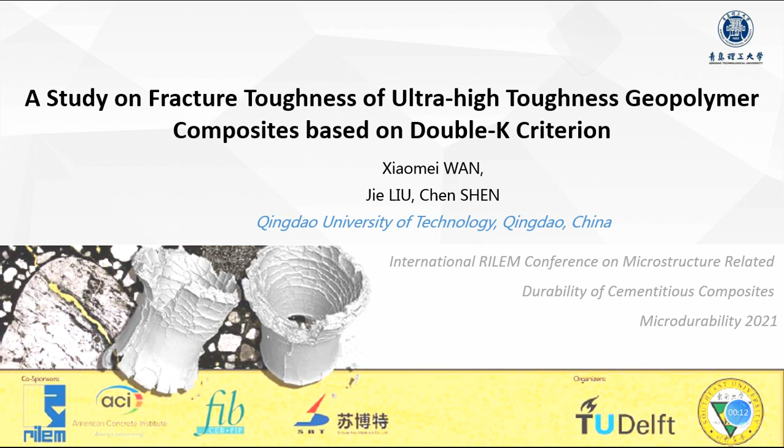The title of my presentation is Fracture Toughness of Ultra-High Toughness Geopolymer Composites based on double K criterion. The presentation involves 4 parts: background, experimental, results and discussion, and conclusions.

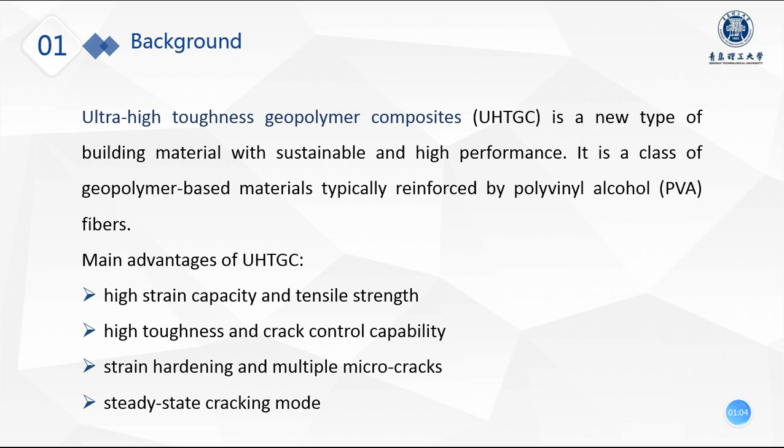Ultra-high toughness geopolymer composites is a new type of building material with sustainable and high performance. It's a class of geopolymer-based materials typically reinforced by PVA fibers. The main advantages of UHTGC involve high strain capacity and tensile strength, high toughness and crack control capability, strain hardening, and multiple micro cracks, steady-state cracking mode.

Fracture toughness provides a criterion for interpreting crack resistance of concrete under different loads. Furthermore, the degree of crack propagation is determined by fracture toughness, which has important significance for analyzing the performance of concrete. Xu and other researchers proposed a resistance curve Kr based on crack cohesion and the double K fracture model, which solved the problem of characterization of the whole process of concrete fracture.

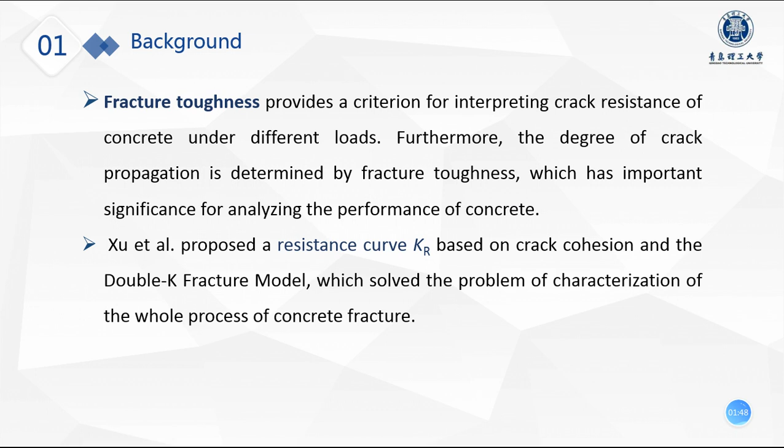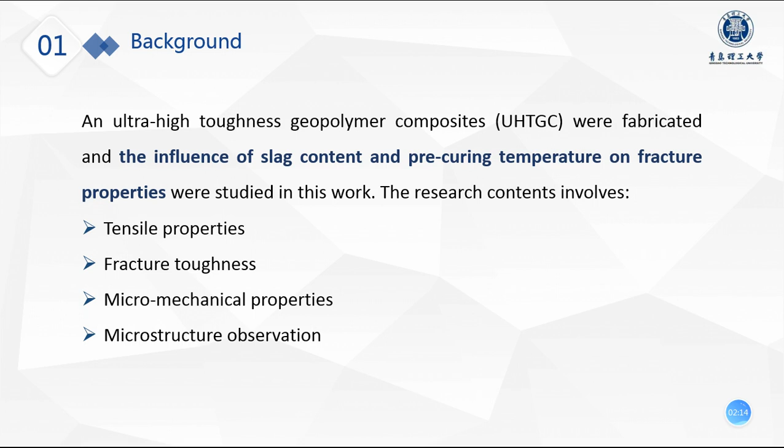In this work, an ultra-high toughness geopolymer composites were fabricated, and the influence of slag content and pre-curing temperature on fracture properties were studied. The research contents involve tensile properties, fracture toughness, micromechanical properties, and microstructure observation.

This is experimental. Fly ash and granulated blast furnace slag were selected as the binding materials. A mixture of water glass and sodium hydroxide solution was used as alkaline activators. A quartz sand with a maximum particle size of 600 mm was applied as fine aggregates. The 2 tables are chemical composition of binding materials and the properties of PVA fiber.

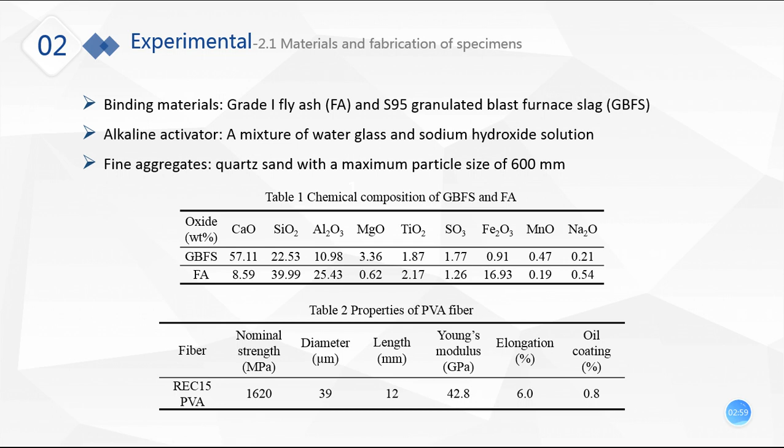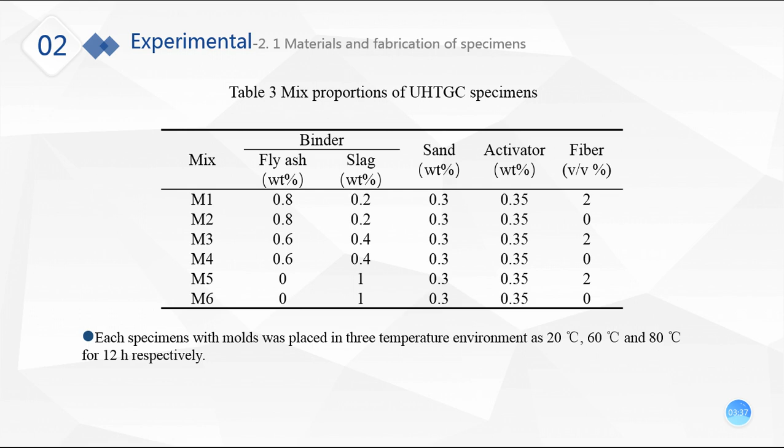6 mixes of geopolymer and geopolymer-based composites were prepared. That's the mixed proportion, from M1 to M6. Among them, M1, M3, and M5 are the specimens reinforced by fiber with 2%. Each specimen with molds was placed in 3 temperature environments at 20, 60, and 80 centigrade for 12 hours respectively.

The tensile properties and strain hardening behavior of specimens were analyzed based on the tensile strain stress curves obtained through the uniaxial tension test. The left figure is a dimension diagram of dumbbell specimen, and the right figure is the loading process of the tension test.

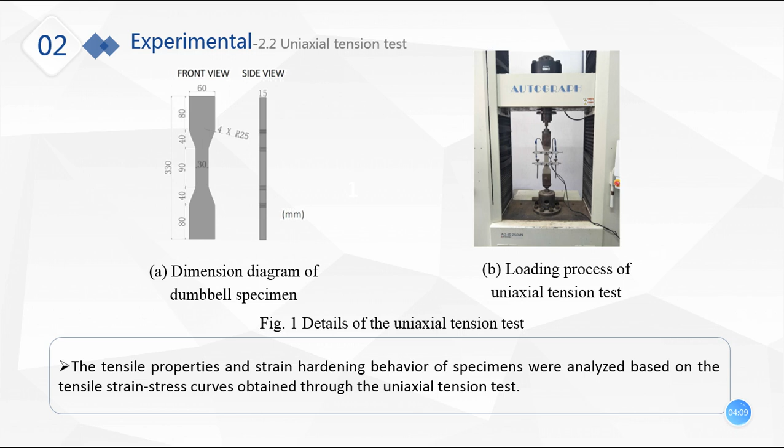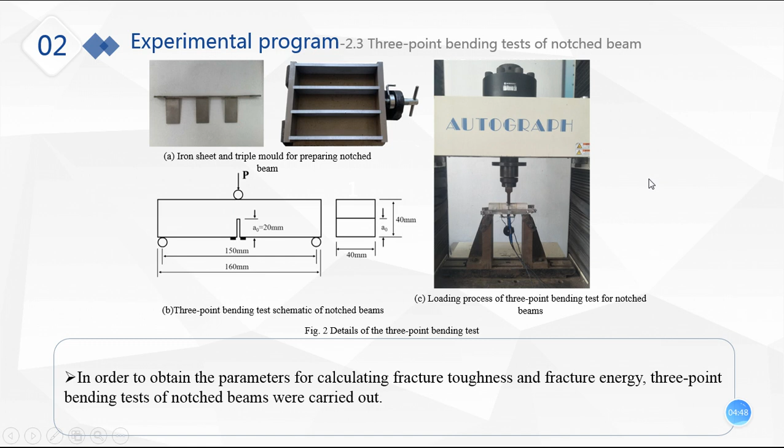In order to obtain the parameters for calculating fracture toughness and fracture energy, 3-point bending tests of notched beams were carried out. This figure is a mold for preparing notched beam, this figure is the picture for the notched beams, and the right one is the loading process of 3-point bending test for notched beams.

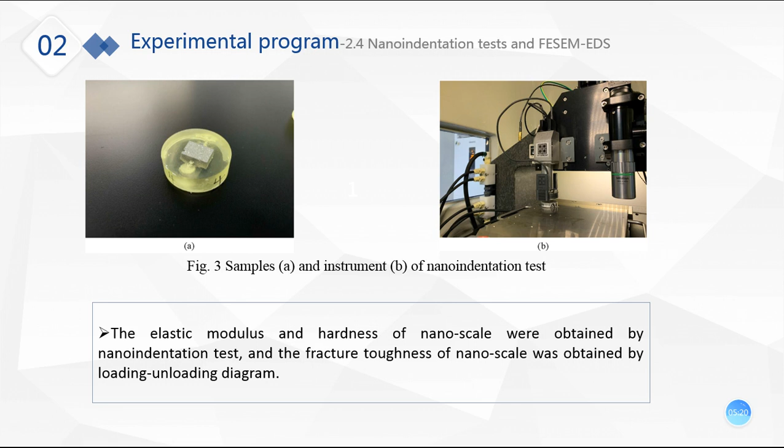The elastic modulus and hardness of nanoscale were obtained by nano indentation test, and the fracture toughness of nanoscale was obtained by loading-unloading diagram. This shows the samples for nano indentation test, and the right one is the instrument, the machine for nano indentation test.

Then let's come to the results and discussion.

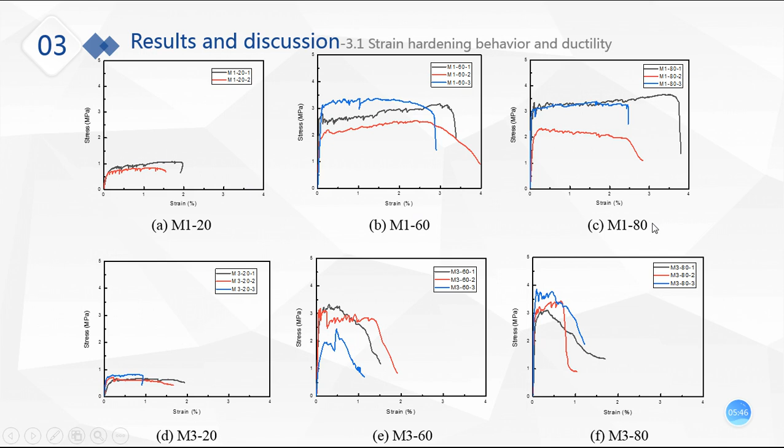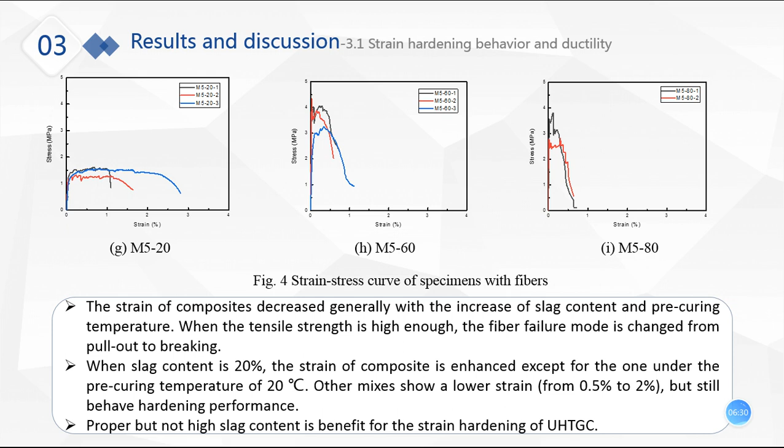These are the strain stress curves of specimens with 2% fibers. 20, 60, and 80 means pre-cured at certain temperature. We can find that the strain of composites decreased generally with the increase of slag content and pre-curing temperature. When the tensile strength is high enough, the fiber failure mode is changed from pull-out to breaking. When slag content is 20%, the strain of composite is enhanced except for the one under the pre-curing temperature of 20 centigrade. Other mixes show a low strain but still behave with hardening performance. Proper but not high slag content is beneficial for the strain hardening of the specimens.

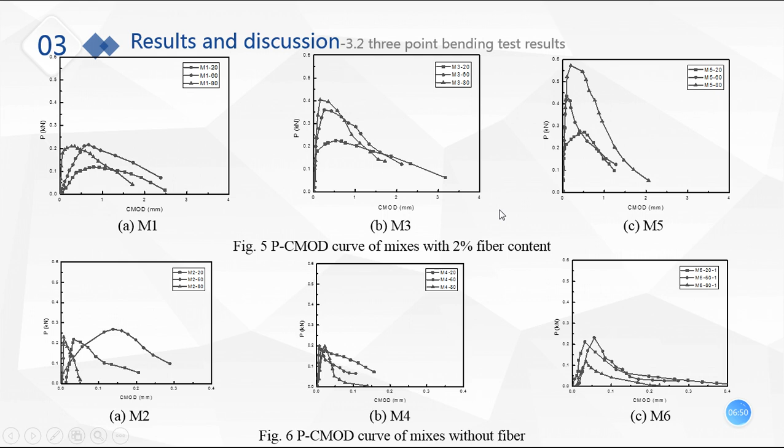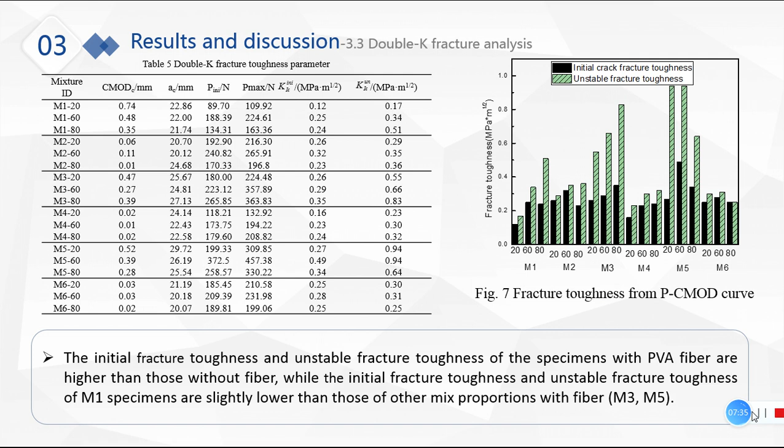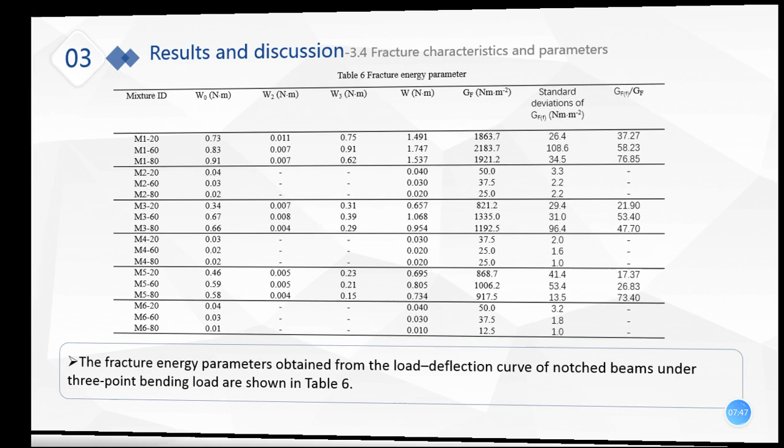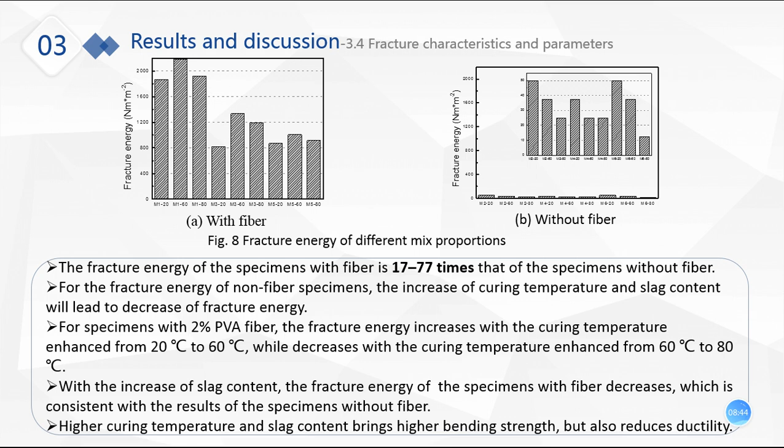For the fracture energy of non-fiber specimens, the increase of pre-curing temperature and slag content will lead to decrease of fracture energy. For specimens with 2% PVA fiber, the fracture energy increases with the pre-curing temperature enhanced from 20 degree to 60 degree, while decreases with the curing temperature enhanced from 60 degree to 80 degree.

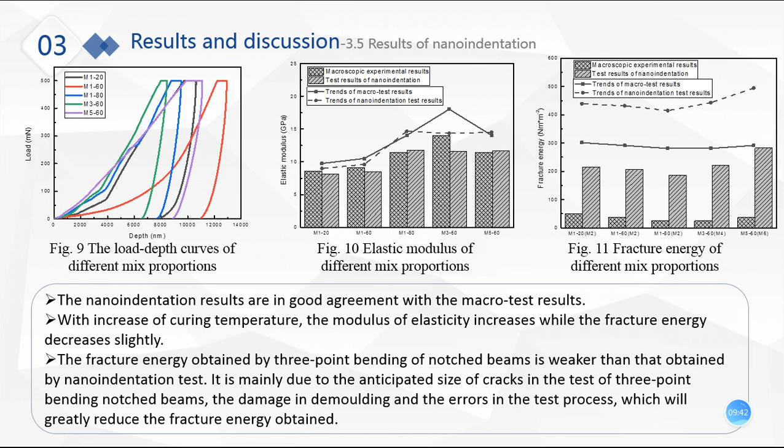Here is the results of nano indentation results, which are in good agreement with the macro test result. With increase of pre-curing temperature, the modulus of elasticity increases while the fracture energy decreases slightly. The fracture energy obtained by 3-point bending of notched beams is weaker than that obtained by nano indentation tests. It's mainly due to the anticipated size of cracks in the test of 3-point bending notched beams, the damage in demolding, and the errors in the test process, which will greatly reduce the fracture energy obtained.

Then let's come to the conclusions. With proper content of slag and pre-curing temperature, the average strain of the composite under uniaxial tension load attains to 3%. Increased content of slag is not conducive to the increase of strain. The ductility first increases and then decreases with the increase of pre-curing temperature generally.

For both initial fracture toughness and unstable fracture toughness, UHTGC is higher than the specimens without fiber. Before unstable cracking, the specimens undergo a stable significant deflection during which the crack length expands continuously. The fracture energy of UHTGC is 17 to 77 times of that of mixes without fiber.

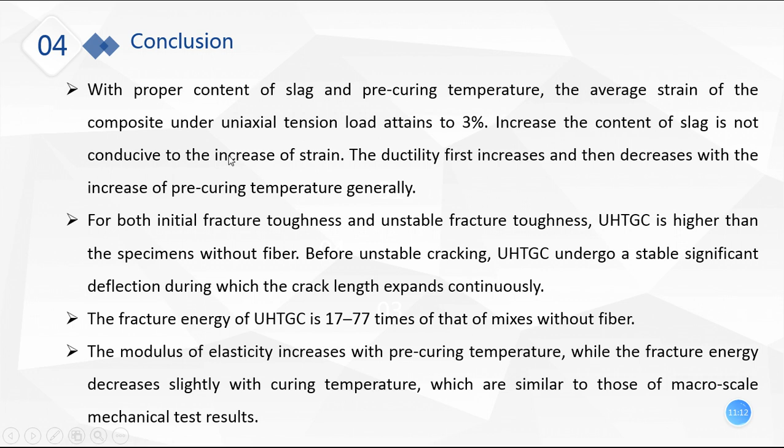The modulus of elasticity increases with pre-curing temperature, while the fracture energy decreases slightly with curing temperature, which are similar to those of macro-scale mechanical test results. That's all of the presentation. Thank you.